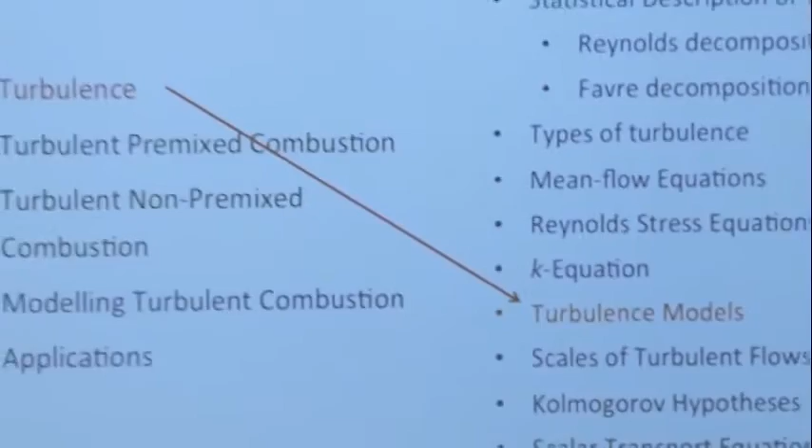Let's try to focus now. So we talked about turbulence yesterday, and we introduced turbulence as a random process that needs a statistical description. You cannot predict each single little eddy, it's impossible. So we said we need a statistical description. We introduced certain ways of defining a mean: time average, ensemble average. We used this Favre average. Doesn't matter - these are just operators that we can apply to a random field, or to the equations describing the random field.

Then we talked of certain simplifications that we make in turbulence, and we derived the mean flow equations - the equations that describe the mean velocities, the mean as defined here in the beginning. When we derived this equation, there was one quantity that was unclosed, a tensor actually, that we don't know, and we need to model somehow. That was the Reynolds stress tensor. We said maybe if we derive an equation for that, maybe that helps us. But we saw that doesn't help, because in that equation you have many other terms that are unclosed. So it just makes the problem worse in a sense.

But then we said, one of the really important quantities to describe turbulence is the turbulent kinetic energy. That's the most important one. If you think of turbulence as eddies, take an eddy - then an eddy can be described by a velocity, let's say in this picture, a rotation velocity or whatever. We call it a velocity fluctuation that's imposed on the mean flow, and a length. If you have these two, everything's defined. Then also you get a rotation time - you can get this from these two quantities and so on.

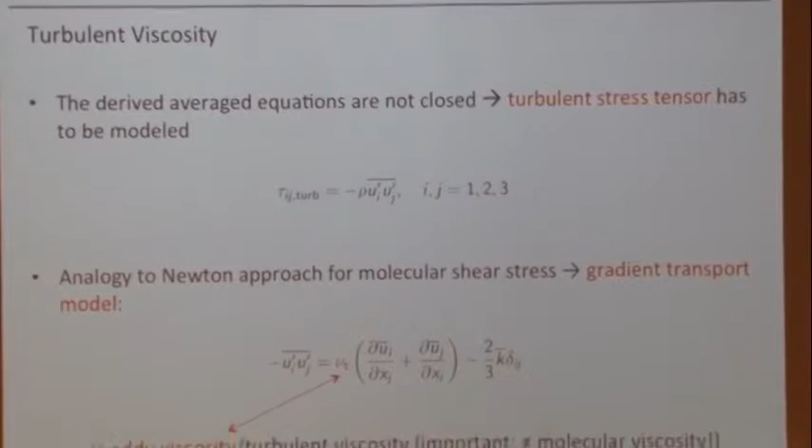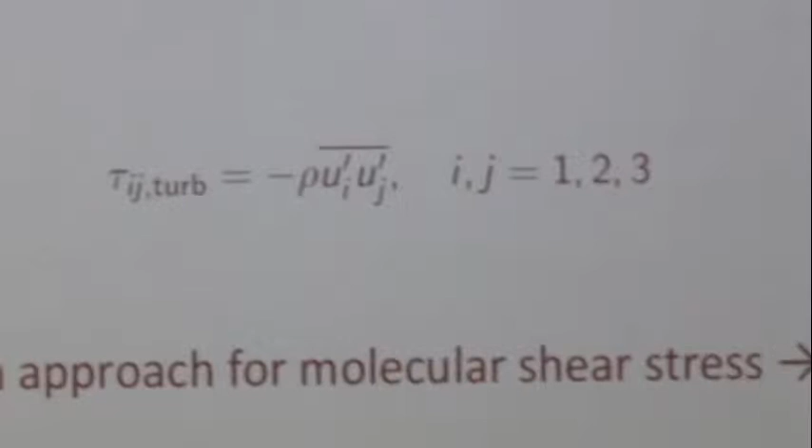We want to talk about turbulence models now. There are different models, but the most used model is the gradient transport model. That's a model that's very intuitive and is often used for terms like this. We know that this is a turbulent transport - it has mathematically, as we said last time, the exact same form as the molecular transport. So think of molecular transport: what's molecular transport? You have a velocity, it goes this way, but each single molecule goes wild in all directions, okay?

And that causes a transport in the mean, a diffusion type process. So turbulence is nothing else: you have the mean flow going one way, but turbulent eddies go in all directions.

Because this has mathematically the same form, we could say for the viscous stress tensor we have a very good model. We know it depends on, is proportional to, a transport coefficient, which is a material property, times the strain rate tensor.

So here we do the exact same thing. We say, okay, let's just say this has the same form, so we use the same model. This now is proportional to a transport coefficient times the strain rate tensor. And this here comes just to make the properties of this thing correct. Let's not worry about this for now.

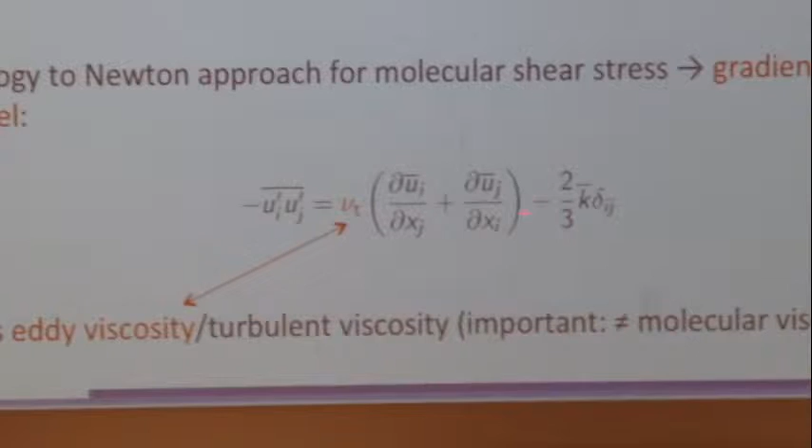Now, because turbulence is not in the material, this new transport coefficient is not the kinematic viscosity for molecular transport, here we have something else. So we call this the turbulent viscosity or the eddy viscosity. And that's not a material property. It depends somehow on the characteristics of the turbulence. So this is how we model this term.

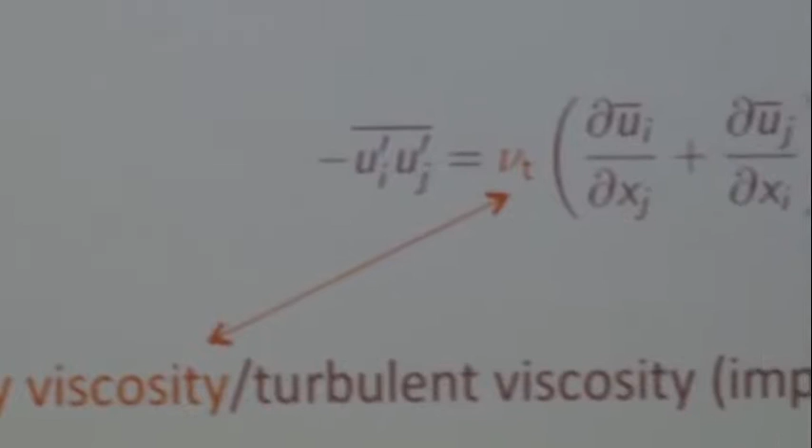And you see, here I had this unknown, and I model it, and now the problem is I have another unknown. So does that help me at all? I have a model to model an unknown, and it gives me another unknown. Does that help me?

Maybe less dependent on your model. Pardon? Maybe the new model is less sensitive. No, that's... it's very obvious if you look at the thing.

Well, this could be highly nonlinear. Whatever happens here, this could be a function of this, and hopefully it could make it very nonlinear.

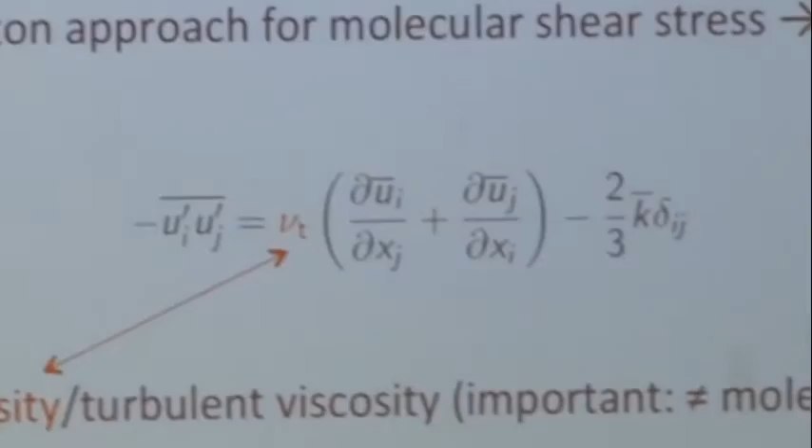This is just a scalar, right? This was a tensor, and so this has 6 unknowns, and now we have only 1 unknown. So in a sense, this helped us already a little bit. And also we put in some functional form here, so maybe that scalar is easier to model also.

Also, this is something that is a viscosity - this thing before involved UI, UJ, whatever that means - and now we have something we call the eddy viscosity. Maybe that's a little more intuitive.

Okay, good. So there are different models for this. Now the challenge is to model this thing. There's the so-called Prandtl's mixing length model, one of the first models. Then there is the TKE, the turbulent kinetic energy based model. And then, what people use today is something like the K epsilon model. The difference between these three really is the level at which these are closed.

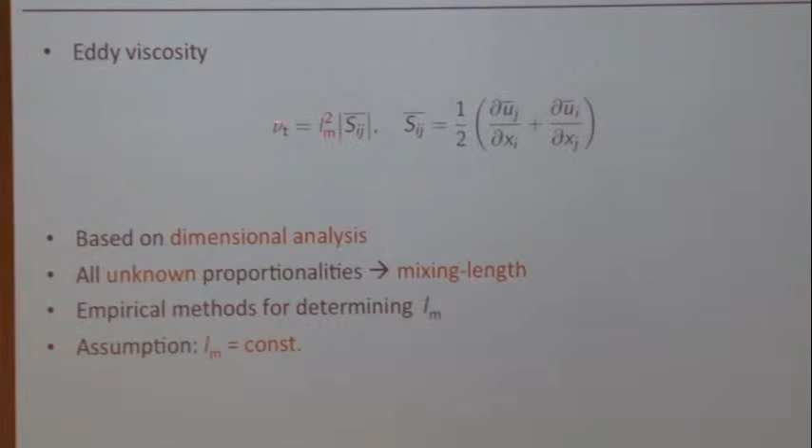So what we'll see, if we look at these in more detail, there is this mixing length model. And what the mixing length model says is - first of all, and this is important, it's not on the slides but it's important - what are the units of kinematic viscosity? This has units of kinematic viscosity.

What are the units? Meters squared per second, okay? So by dimensional arguments, this has to depend on the turbulence. We said the turbulence can be described by a velocity fluctuation and a length scale of the dominant eddies. So if we want to build a viscosity from that, it would be just U prime, the velocity fluctuation, times a turbulent length scale, the length scale of the dynamically important eddies.

So this is how we want to model this. And now the question is just how can we model these individual terms? Why do we do this? We say this depends on turbulence, and these are the quantities that describe turbulence. Dimensional analysis gives us this.

Now we had one unknown, now we have two unknowns. It seems we're going the wrong way, but this is not a very intuitive quantity. If I would ask you, in a turbulent flow, how large is the turbulent viscosity? Can you estimate this? You would have to say maybe 1,000 meters squared per second. We have no feel for this.

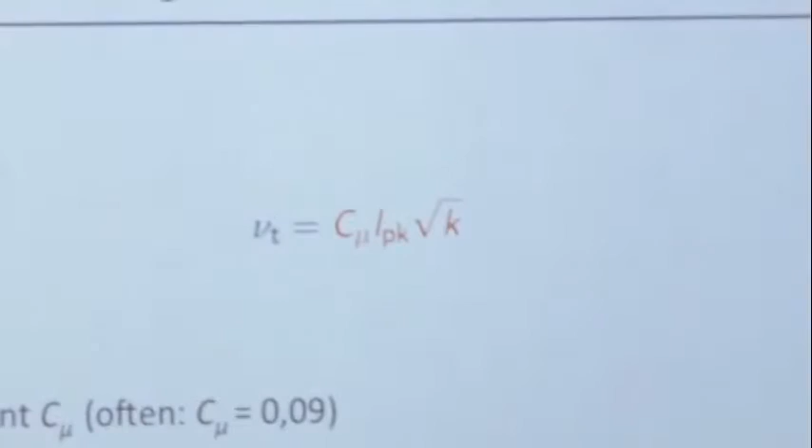And so the next model here is the turbulent kinetic energy model. That's already going quite close to modern models, where we say, okay, same thing again. L is still here, this is L. And then for the velocity scale, we say the velocity is just the square root of the kinetic energy. That's the velocity, the turbulent velocity fluctuation. And now where do we get K? K comes from this transport equation I showed you earlier.

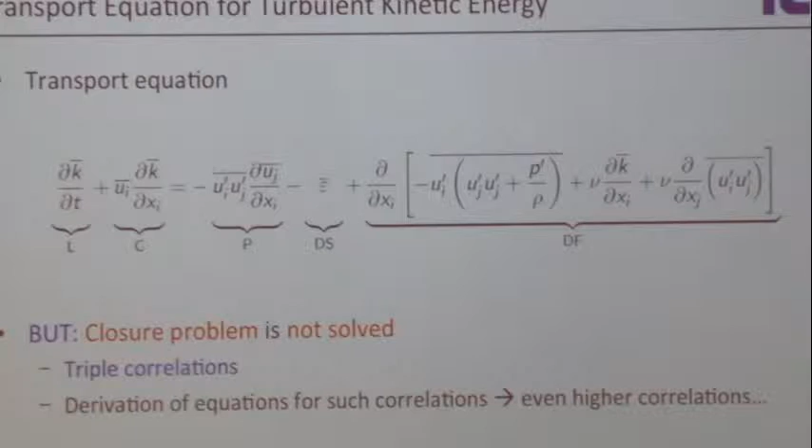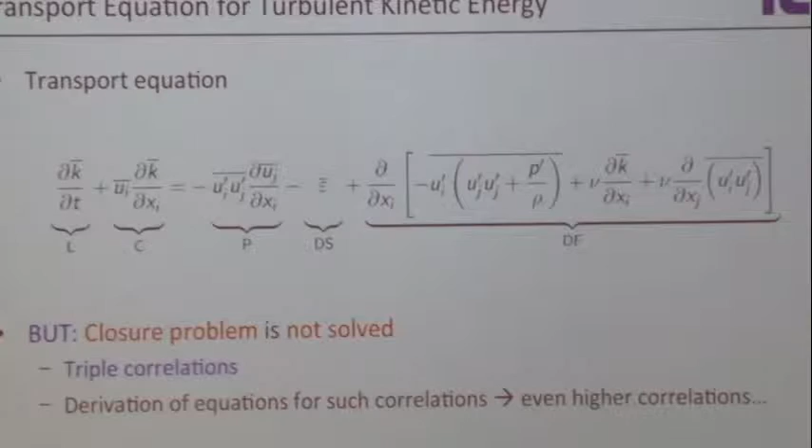So let's see if we say anything about this. This is the K equation. And so here all we need to do now is we need to say, this we don't need to model anymore, right? Because this is closed. If I have a model for nu t, that gives you a model for ui, uj. So this is within this model, this is closed already. This here, we use a gradient transport assumption, and this here, there's a model for this also. So this needs to be closed, but that's how this model works. So here you solve an equation for kinetic energy, and you still have to guess this thing. So it's still a model. It's not complete in the sense that as a user, you don't need to have real good physical insight.

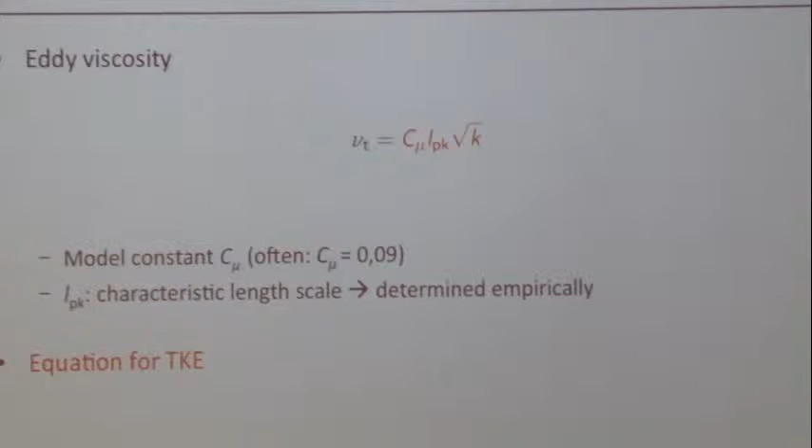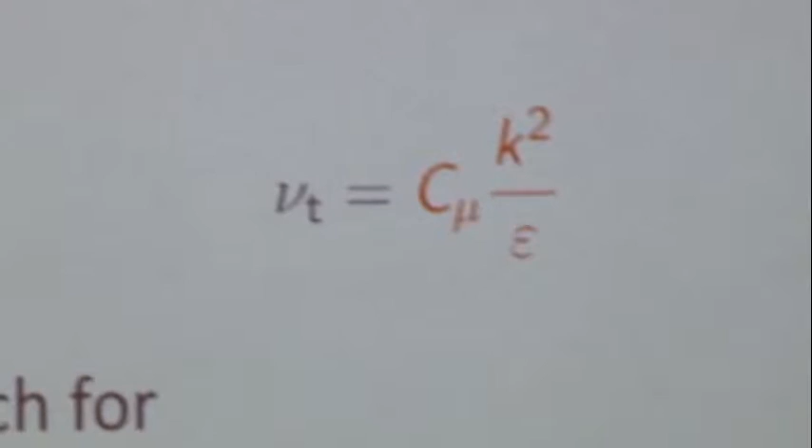So now the models they use today are, let's say, K omega model or K epsilon model or things like that. And the K epsilon model, that's one of the most well-known, is the same thing. Here you say U prime times LT. U prime, that's again from the kinetic energy, is K to the 1/2. And then you say, now I need a second quantity. I want a second transport equation for a length scale. So you could solve an equation for a length scale, for example, but here, because epsilon is an important quantity, here people suggested to solve an equation for epsilon, okay?

And then just by dimensional arguments, you have k, you have epsilon. Epsilon is the turbulent kinetic energy dissipation rate. You can find a form for this L. And it turns out, K has units meters squared per second squared. Epsilon is a kinetic energy dissipation rate, so that has units kinetic energy per unit time. So it is meters squared per second cubed. That's what it is. And so if you put these two together, LT, a length scale, is k to the 3/2 divided by epsilon. So I put these two together, this is what I have.

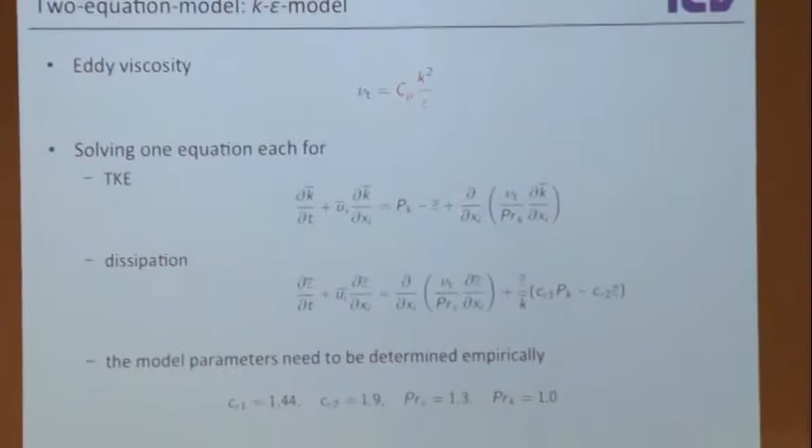And now I have two equations here. One is the k equation, one is the epsilon equation. And so you see, for this transport term, we just use a gradient transport assumption. There's the nu t here again. And then basically the way you do the epsilon equation is you just write the same equation.

Transport, in a sense, is an empirical equation. These are the same terms here: advection, turbulent transport, and then production and dissipation, also using the same terms. You just make them dimensionally correct so they fit this equation. That's what it is.

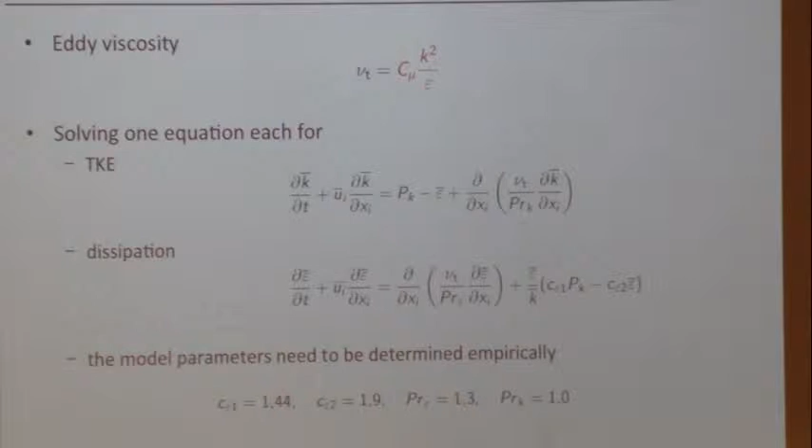And then there are a lot of constants here. These constants are given like this for certain cases, and for other cases they're different. For certain cases, these constants work well, and for other cases they don't, and you have to use a fit constant. So there's a lot of fitting with this K-epsilon model, with this C epsilon 1 and C epsilon 2 constant. But that's a model one can use.

This shows once more how these terms are modeled. This is the turbulent transport term here. Essentially, you just take this whole thing and use a gradient transport assumption. The production term doesn't need to be modeled, as I said, because I can just plug in the model here for u i u j, and it is closed. And this is all that was to be done.

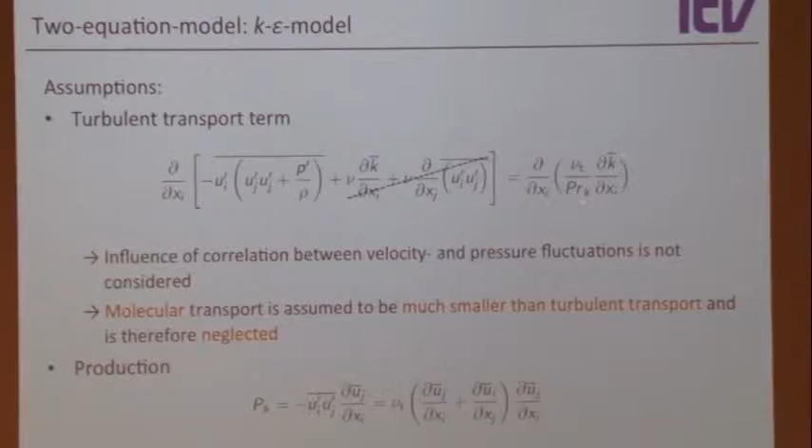Because these are not actual Prandtl numbers. This is not the Prandtl number. You could say this is a Prandtl number for k. The Prandtl number refers to a scalar, and k is a scalar, so this is just a Prandtl number that refers to k. And this here is a Prandtl number that refers to epsilon. But again, these are basically fitting constants.

Because really, you could say this is a scalar equation, so you would have to have a diffusivity here, but we use the exact same transport coefficient as for the momentum equation. And if you would do the same thing for the viscous term, then you would put a Prandtl number there. So here also we call this a Prandtl number or a Schmidt number, whatever you want to call it. These are just fit constants. They don't refer to molecular properties like an actual Prandtl number.

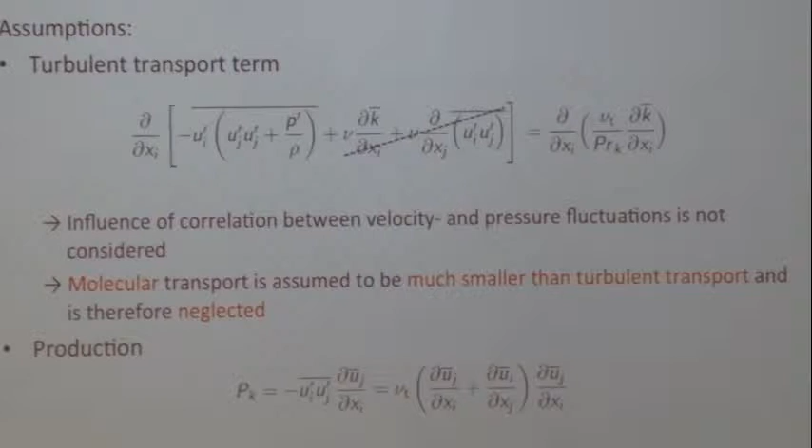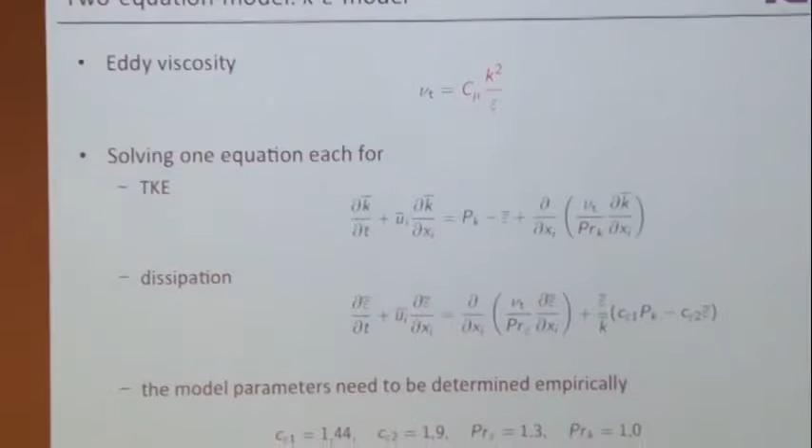That's the point - these are, in a sense, fit constants. These values here you can actually determine by writing these equations. If you write this model for isotropic turbulence, you can get the decay rate of isotropic turbulence as a function of this C epsilon 2 parameter. So if you know the decay rate from the experiment, you can get C epsilon 2. And then C epsilon 1, in a similar way, you can get for homogeneous turbulence.

But these values that you get for these ideal cases don't work in real life. So the thing about the K-epsilon model is, in a sense, it's an empirical model, and for each different case you basically have to refit these values. But it's not as bad as it sounds, because if you compute a turbulent planar jet, we know these work. If you compute a round jet, we know they don't work - you get the wrong spreading rate. But people know values for this that also work for a round jet, and so on. So it's an empirical model, and one has to adapt it.

So if you have a better set of coefficients, use your better set of coefficients for your case. So if you say it's too high or too low, that refers to your specific case, not to the general world.

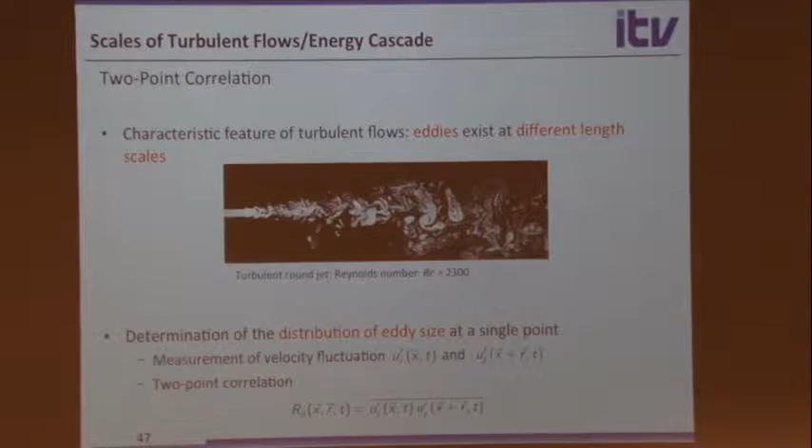So we have models now, but we want to look a little more into turbulence physics, because that becomes important later on. I want to show you how analysis is done in turbulence. In turbulence, we talk about these eddies and so on, and the question is how do you... So we said an eddy has a velocity fluctuation - that's the turbulent kinetic energy, and we have an equation for that. But the length scale, we don't have a real way of defining this for now.

What people do in turbulence theory is they very often look at these 2-point correlations. The idea is that you take the velocity at this point and the velocity at a different point, and you do this many, many times, and you look if they correlate. If they correlate, that would mean they are part of the same eddy. If I measure velocity here and way over here, and my turbulent eddies are much smaller than this distance, then most likely these are totally uncorrelated. So when these points are very close together, they must be perfectly correlated, and when they're far apart, they're not correlated. How fast this correlation drops tells me something about the size of the eddies.

So this is the 2-point correlation. It's a very complex function, because I can correlate the u velocities, but I can also correlate the u and the v velocity, or the v velocity here with the u velocity over there. So it's a tensor.

This correlation function is a function of space. I can evaluate this everywhere - my first point can be anywhere in space, and my second point can also be anywhere in space. So it's a function in 6 dimensions. It's a function of time, and it's a 3x3 tensor. So it's relatively complicated - you can't measure this thing, it's impossible. But for theory, you can use it.

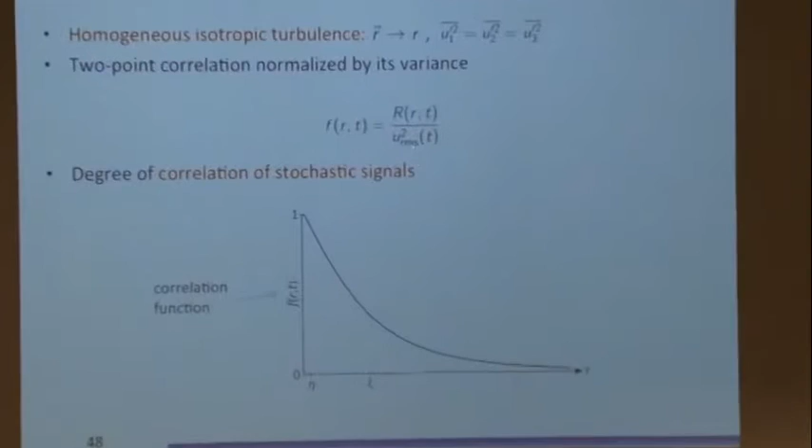You can normalize this. If you normalize this with u squared, that is just the correlation function for r goes to 0 - then it's just u squared at this point. So this means at r equal to 0, this function, the correlation function, has to be 1. And as I said, for r goes to infinity, the correlation should go to 0. How fast it goes to 0 tells me something about the correlation.

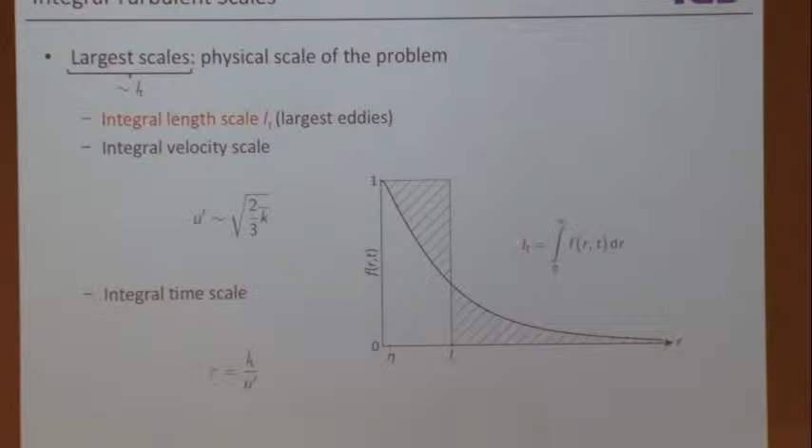So we define our length scale with this. We say the integral of this correlation function gives me the length scale of the large turbulent eddies. We call this length scale typically the integral length scale, because it comes from this integral. So integral length scale just means that's the length scale of the large motions of the turbulence.

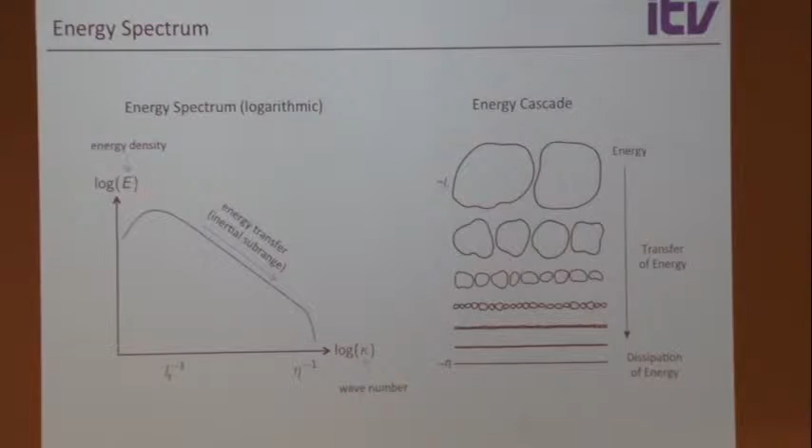So interesting is that this is a function of r, the distance of these 2 points. And if you do a Fourier transform of this, then you get the energy function, which is now a function of the wave number. That's because this basically has units of u squared, the units of energy. This energy function, if you take the Fourier transform, is basically energy as a function of the wave number, and the wave number is just the inverse of the length scale. So this energy spectrum function shows you the energy you have at a given eddy size.

So this is how it typically looks like on a logarithmic, or double logarithmic scale, and what you see is you have a lot of energy on the large scales - small wave number means large eddies. So this is small wave number, this is very high wave number. At small wave number you have a lot of energy; at high wave number you have almost no energy.

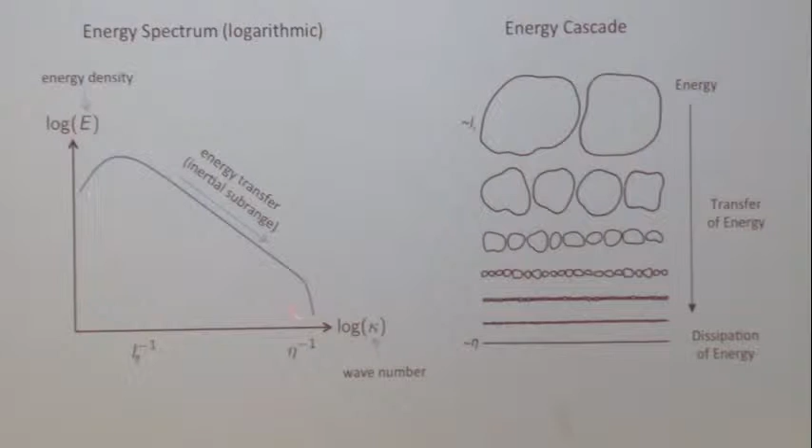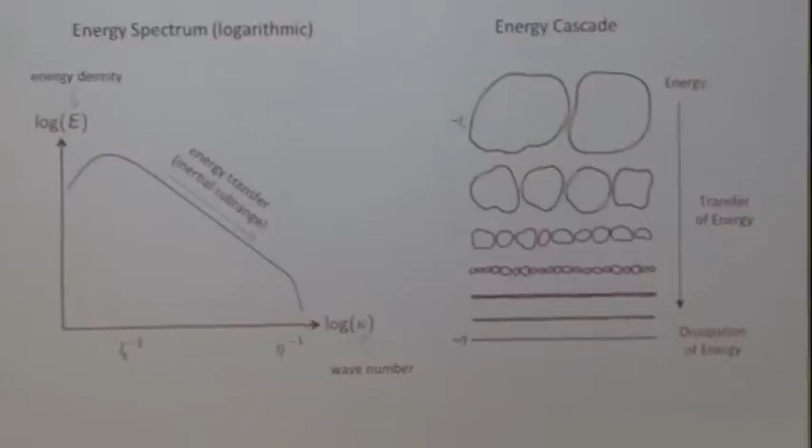But we said all the dissipation of the energy happens at these small scales, and the production happens at these large scales. So this is how turbulence works - it's produced at the large scales and dissipated at the small scales. This means there must be some mechanism that converts large eddies into many smaller ones, these smaller ones into even smaller ones, and so on. That's what we call the energy transfer in this wave number space. This is the vortex stretching mechanism I mentioned last time - it takes the energy of these large eddies and makes them smaller and smaller.

So in turbulence theory there are these Kolmogorov hypotheses, and that's something that really helps us understand turbulence.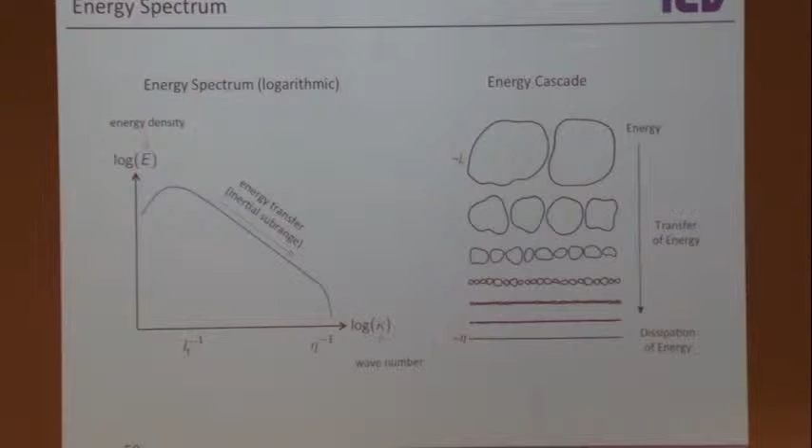The first thing Kolmogorov said is when we look at these small eddies, if I look at the spectral content, at all the eddies with very high wave number, then he said they must be isotropic. They don't know the direction anymore, and there are reasons for that.

Then he said the statistics of these eddies depend on only two parameters: the dissipation, the turbulent kinetic energy dissipation rate, and the kinematic viscosity. This comes from dimensional analysis, but really the way he did it is he took the equations, derived and simplified them, writes them for this, and sees it has these two parameters and nothing else.

If it depends only on these two parameters, you can form a length scale from them, and this length scale is the so-called Kolmogorov length scale. That is the length scale where the advection process that makes the eddy smaller and smaller, and the viscous process that tries to damp out the turbulent fluctuations, are equal. So this is the smallest length scale in turbulence.

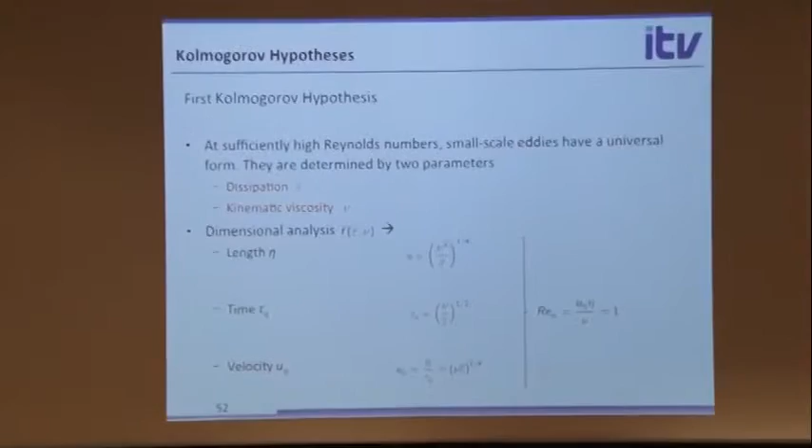You can also build a Kolmogorov time and a Kolmogorov velocity. So this describes these very smallest eddies. And if you build a Reynolds number with these three, it's equal to 1, which basically means that here the inertial and the viscous forces balance each other. So that's the first hypothesis.

That's already very exciting. But then he came up with a second hypothesis, which says: if I look at scales much smaller than the large scales, things don't depend on the large scales anymore—that was the first hypothesis. But what if I look at length scales much smaller than the large scales, but at the same time much larger than the small scales—somewhere in between?

If I'm much larger than the small scales, then it shouldn't depend on viscosity anymore, because viscosity only becomes important at small scales. So there must be a range, the inertial subrange, that doesn't depend on the geometry of the flow, the nozzle geometry or whatever, because it's so much smaller than that, it doesn't know anything about it. And also it doesn't know anything about viscosity, so it must be independent of viscosity as well.

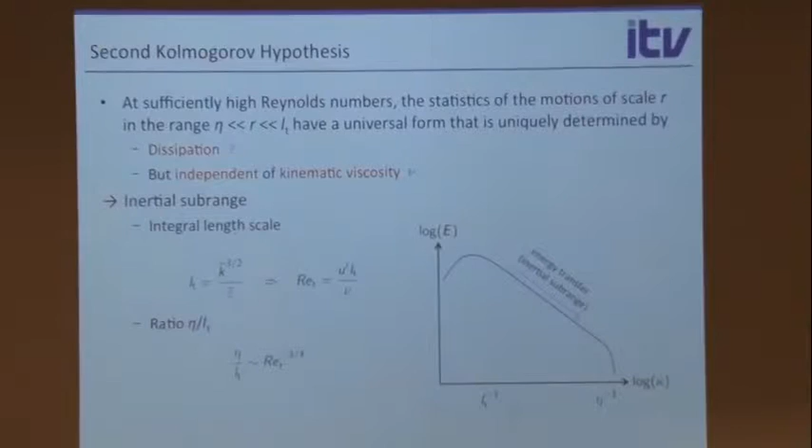So this only depends on epsilon, and epsilon is the energy transfer rate—the rate of energy transferred from the large to the small scales. And from this you find the so-called Kolmogorov scaling.

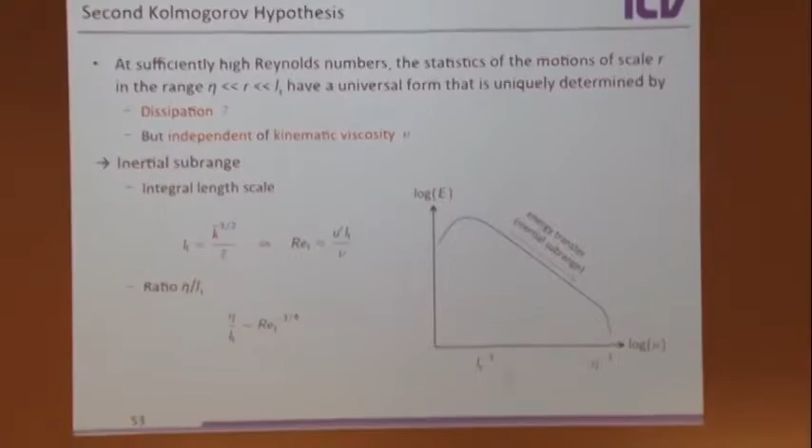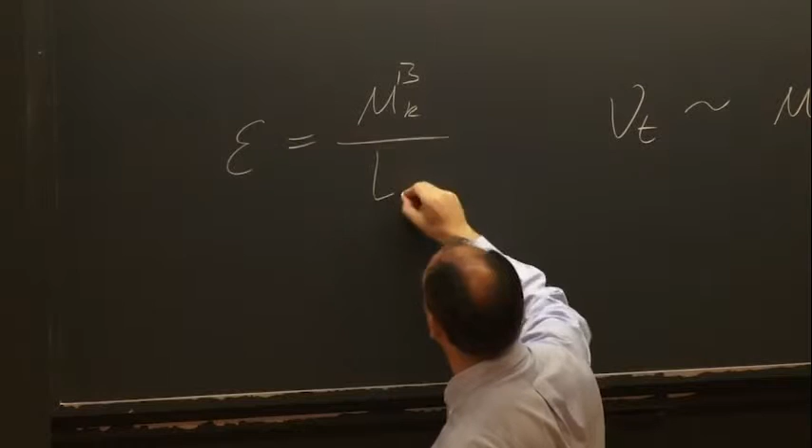It turns out that at any length scale—this is written here for the integral scale, but at any length scale, any wave number k—you can say the velocity fluctuation at that scale, cubed, divided by this length scale, is equal to epsilon. This is true for all scales. That's the so-called Kolmogorov scaling, very important for turbulence.

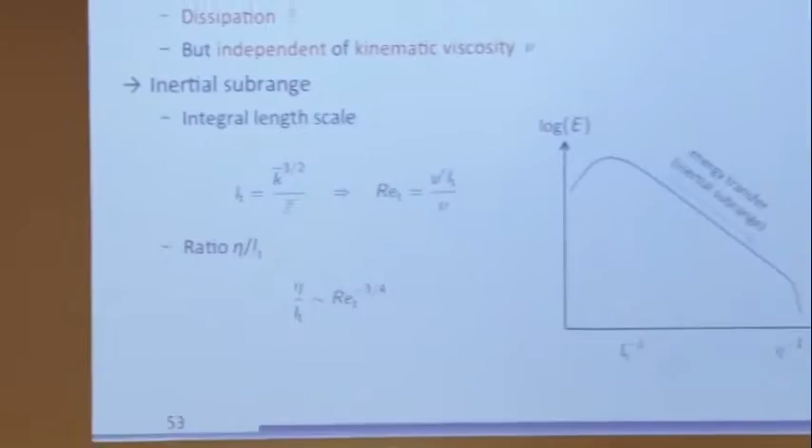This is written here for the large scales. If you use this scaling, you can find that the ratio of the Kolmogorov scale—the smallest scale in turbulence—to the largest scale in turbulence is proportional to Reynolds number to the minus three-quarters. That's important sometimes when we do simulation. So that's just a little bit about turbulence theory.

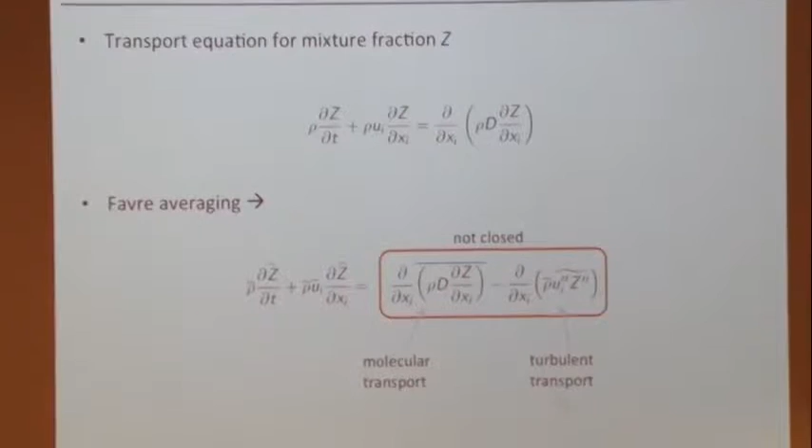Then we talked about the Reynolds equation for the velocity. Here in combustion, we're often interested in scalars, so this would be the equation for mixture fraction. We can do Favre averaging here too, and then we get these terms: a molecular transport term and a turbulent transport term. The molecular transport term is usually neglected in the Reynolds averaged context.

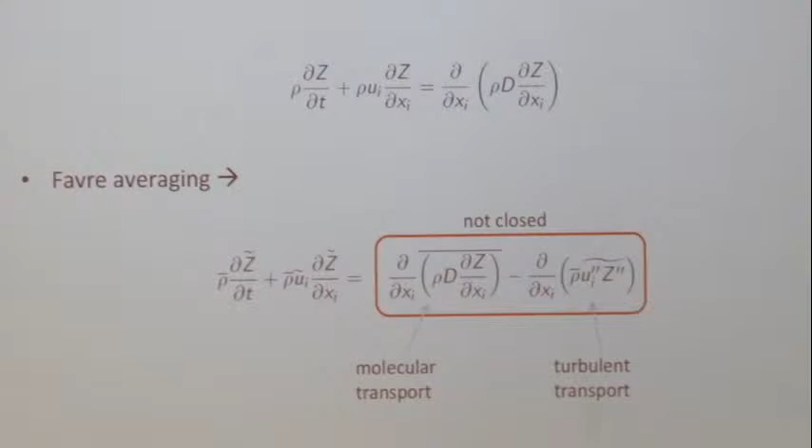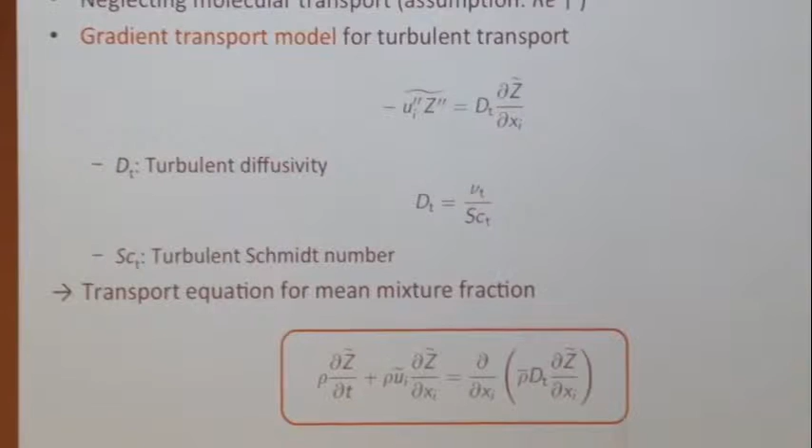This term is modeled again with a gradient transport assumption—same thing as before. So here, gradient transport assumption gives us a turbulent diffusivity, D_t, and if you assume a constant turbulent Schmidt number, whatever value is good for you—people sometimes use 0.7—we relate it back to the eddy viscosity. We already have a model for that. So this is the equation here.

Then the other thing that's important: for the velocity field, we had an equation for the mean, and then an equation for the kinetic energy.

We want to have an equation for the mean, and then one for the scalar fluctuation, some equation that tells us something about the scalar fluctuation—the so-called scalar variance. The variance, the fluctuation, is just the instantaneous minus the mean. So I can take the equation for the instantaneous minus the equation for the mean, and that gives me an equation for the scalar fluctuation.

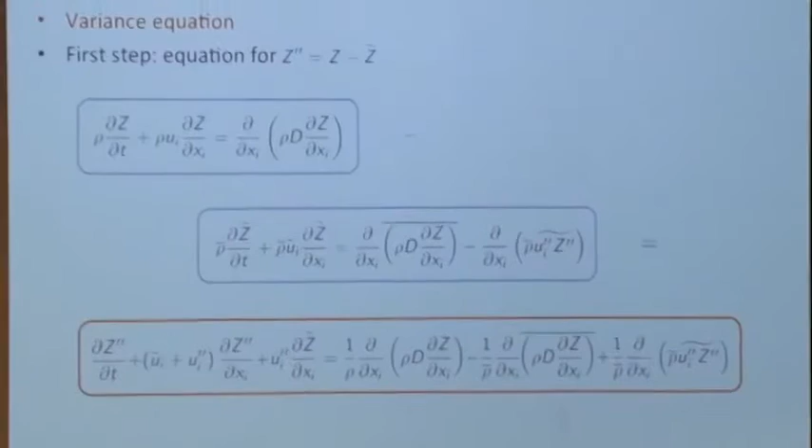Now I multiply that by z prime prime and average, and I get an equation for 1/2 z prime prime squared average. That's the scalar variance. If you do that, this is what you get—since it's 1/2 multiplied by 2, the 2 ends up here somewhere.

This equation is again very similar to the kinetic energy equation, in the sense that you have the unsteady term and the advection term, and then a turbulent transport term, which we model again with a gradient transport assumption. Then we have a production term, which depends on the equivalent to the Reynolds stress tensor, but now for the scalar—we call it the turbulent scalar flux.

This term is modeled with an eddy viscosity type model, or eddy diffusivity type model—a gradient transport model. Then we have the dissipation rate term, defined as the gradient of the fluctuations squared mean.

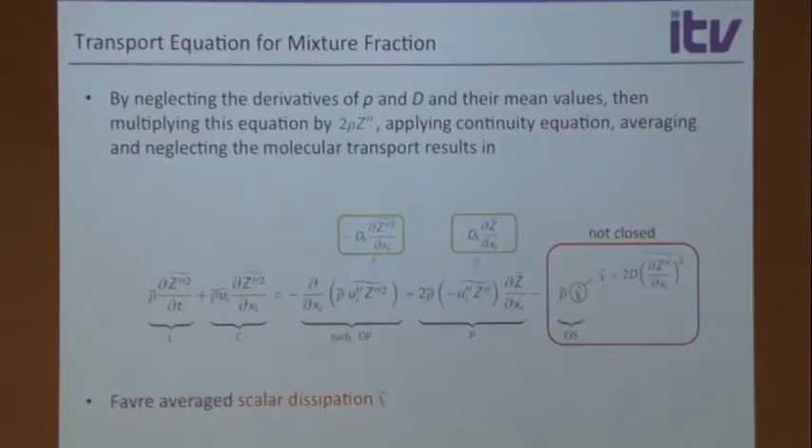That's something that's important only at the very smallest scales, and what it does is dissipate the variance. For combustion, this is very, very important—think about it: let's say you have...

A fuel stream and an air stream, initially unmixed. Here's some spatial coordinate, and here's mixture fraction, going up to 1. In this part you have only fuel, and in this part only air. What does the turbulence do? The eddies just take some part of this and put it over here, and take some of that and put it over there, but they don't really mix.

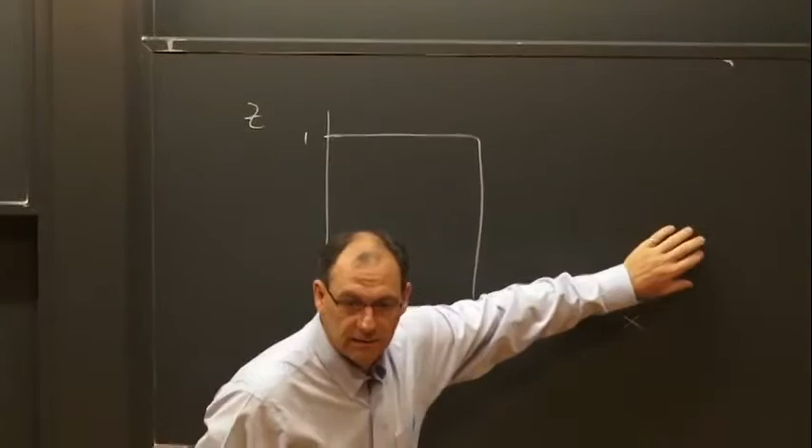So the turbulence first gives you something that looks like this, then smaller eddies break this up again, and you get things that look like this but on all scales—still all 0 and 1, nothing in between. The turbulence just moves stuff around, makes the scale smaller, the gradients larger, and so on. But the original profile has no variance in these parts.

But once the turbulence starts mixing this, you create a lot of variance—a lot of fluctuation. The mean looks something like this, but at each point I have the maximum possible fluctuation. So this gives you a large variance, and then dissipation here is what...

...the viscosity, or the diffusivity, now does. It will mix these on a molecular level, so that ultimately everything is mixed on a molecular level, which means it takes out the variance. Taking out the variance means mixing fuel and oxygen on a molecular scale.

Remember we said earlier, if you assume infinitely fast chemistry, then in non-premixed combustion—which is what this is supposed to represent—things mix and burn. For infinitely fast chemistry, the burning rate depends only on molecular mixing, and this term is responsible for the rate of molecular mixing. So for infinitely fast chemistry, this would be something like your reaction rate.

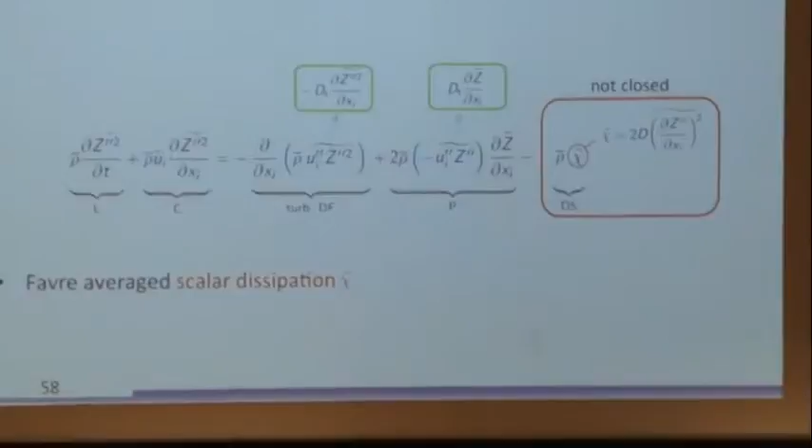But for finite rate chemistry, this is still very important, though the chemistry also matters. This term for combustion is very, very important to get right, because it gives you an estimate already, or an upper bound, for the reaction rate.

Okay, so this is how we model this.

For the K epsilon, for the momentum field, we said we solve an equation for this. You could do this also here, but what's done very often is you say, I can define a time scale from this. This has units 1 over a second. Let's start here: this has units kinetic energy, and this has units kinetic energy per second. So this ratio is seconds.

So now if I do the same thing, if I define a scalar timescale here in exactly the same way, the dissipation rate in the denominator and the variance in the numerator, I also get a second here. And so we say the assumption here is that the timescales are equal, or they're proportional to each other, like here.

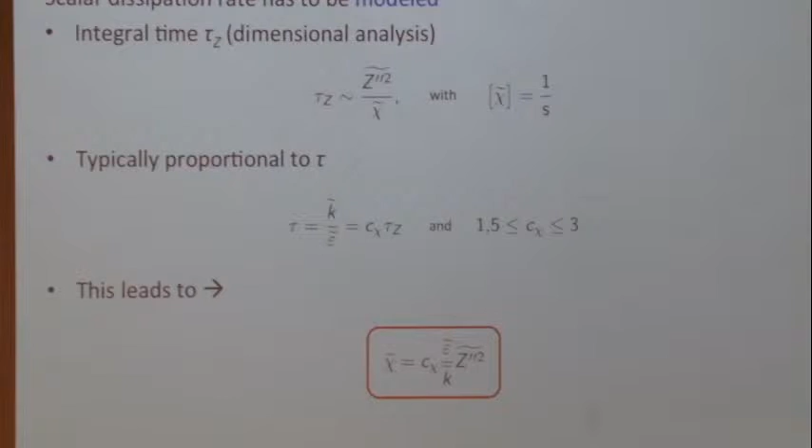So if we do that, then the dissipation rate is epsilon over k times the variance. So then this equation, if I use this, is closed, because we assume the timescales are equal.

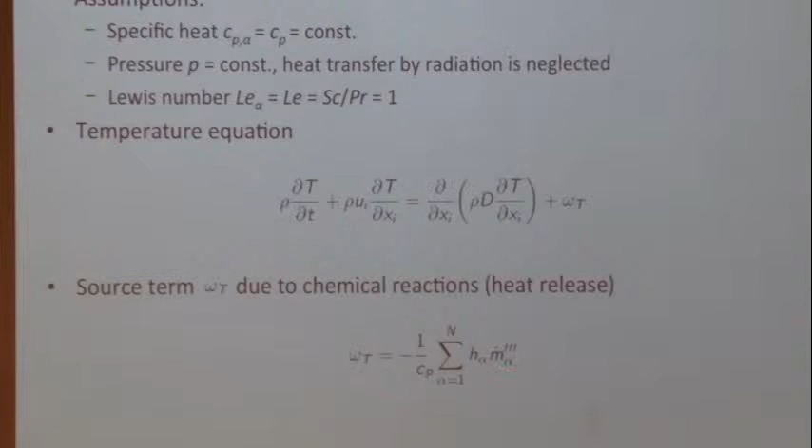Now we can do the same thing for the reactive scalars. Let's take the temperature here, with a chemical source term. This is the species equation, also with a chemical source term. You see the form of these is roughly the same if I neglect a few terms here for the temperature, which we do just for illustration purposes.

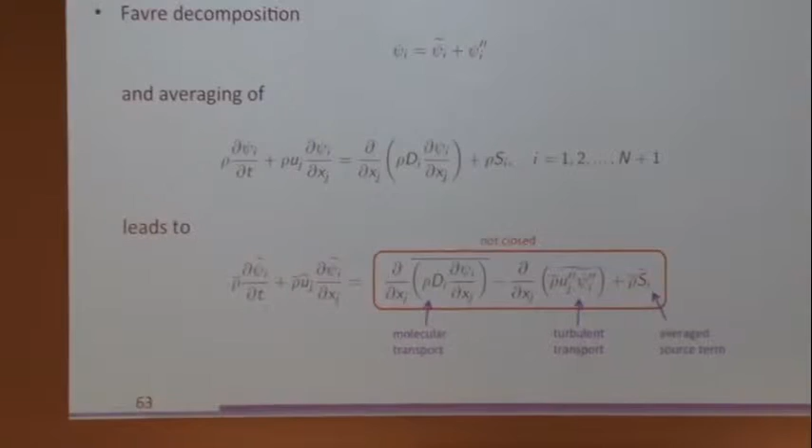But then I can define a scalar here, a reactive scalar, which could be either the species or the temperature. And I have this equation with a source term, and I take the average, introduce the Favre decomposition, take the average, and I get the same equation as before, just with the extra chemical source term. I can make the same modeling assumptions, and the only thing that's different here is really this chemical source term.

Now, the chemical source term is not so simple. It's very nonlinear, and we said if it's nonlinear, you get these correlations, like the Reynolds stress. We got that only because the advection term is nonlinear, and this is not like that—the Reynolds stress is like Mickey Mouse, the advection term is like Mickey Mouse compared to the chemical source term. The chemical source term is so nonlinear that you'd expect something big to happen in this correlation term.

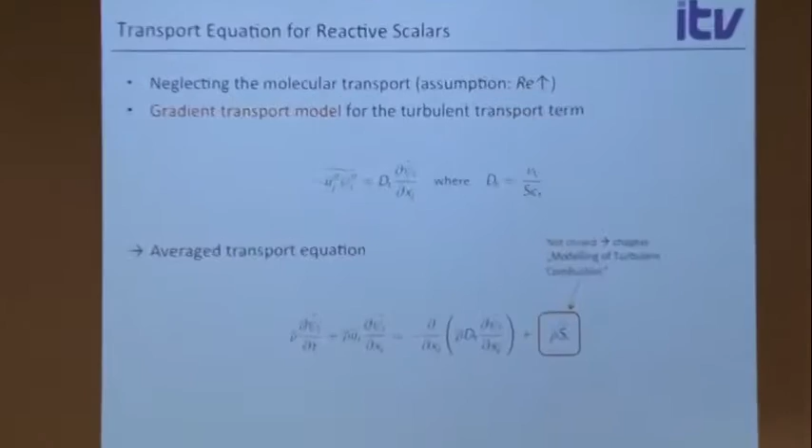Given the fact that the Reynolds stress term already made a huge difference, that's something to keep in mind, and we'll talk about this in one of the next lectures—what error we make when we model this in a naive way, and also how we can model this in a better way, maybe.

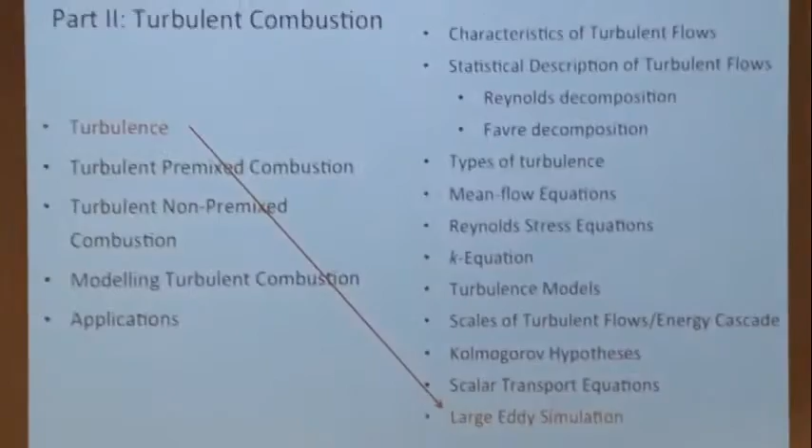Okay, at the end, I just want to say a few words about large eddy simulation. Large eddy simulation—so maybe first about direct numerical simulation, a term I've used already. Direct numerical simulation means nothing else than taking the governing equations, maybe the Navier-Stokes equations plus the scalar equations, energy equation, and everything, without any modeling assumption, and just solving these equations.

Now, without any modeling assumption is not actually true. If you just solve the momentum equation, it has the viscous stress term—that is a model already, but we know this model is just perfect, the model we use for the viscous stress with kinematic or dynamic viscosity. So we say these are the true equations that describe the true flow physics, and it turns out they do. This is really, really good.

So when you add the scalar equations, then you have a chemical source term. You have to have a chemical mechanism, a reaction mechanism—these are models. So in a sense, you make some assumptions, but this is what we call the true world. Given a chemical mechanism, this would be the truth.

So why do we talk about modeling at all if we could just solve these equations? The fact is that you can solve these equations for true turbulent flow, everything, but only for a very, very small volume, because it's so expensive to solve, since in turbulence you have such a big range of different length scales. That's the real problem. So if we want to estimate what it takes to do this...

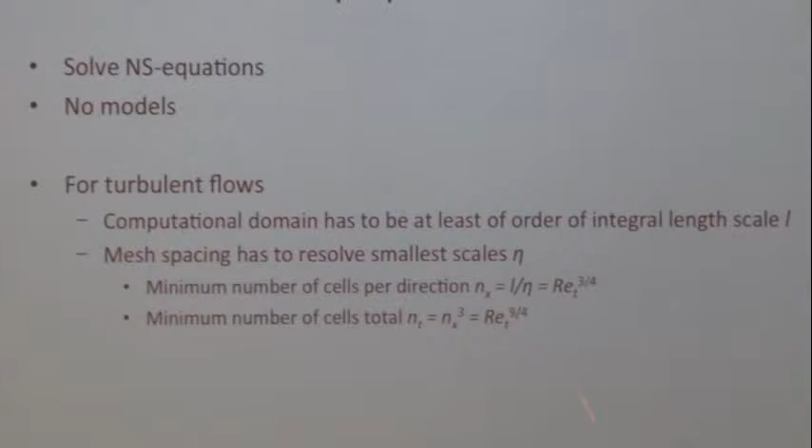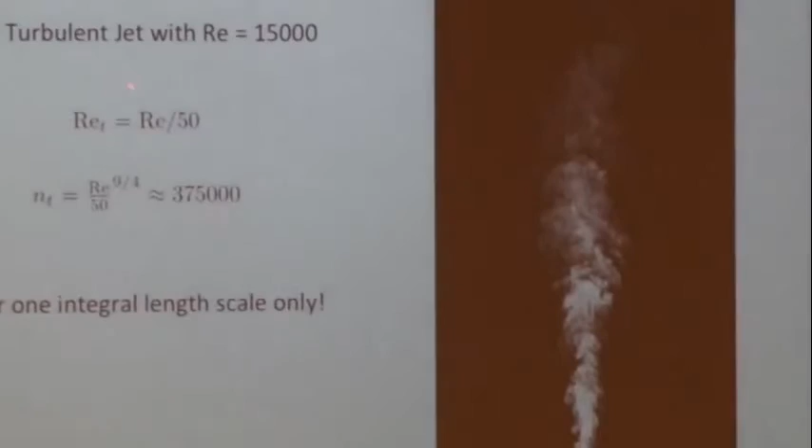Okay, so now you can estimate the jet Reynolds number. This is the turbulence Reynolds number. Jet Reynolds number is typically 50 times the turbulence Reynolds number. If you have a jet with a jet Reynolds number of 15,000, the number of points you need is like 375,000.

That doesn't seem so much, but the point is that would be just for one integral scale. See, this is one little area here. If I want to compute this whole thing, you can imagine how huge what I need would be.

By the way, this picture is taken from the book of Steve Pope, called Turbulent Flows. Nice book on turbulence. I teach my turbulence course at home according to this book, and you see some of the material in this lecture is also from this book. I just want to acknowledge this.

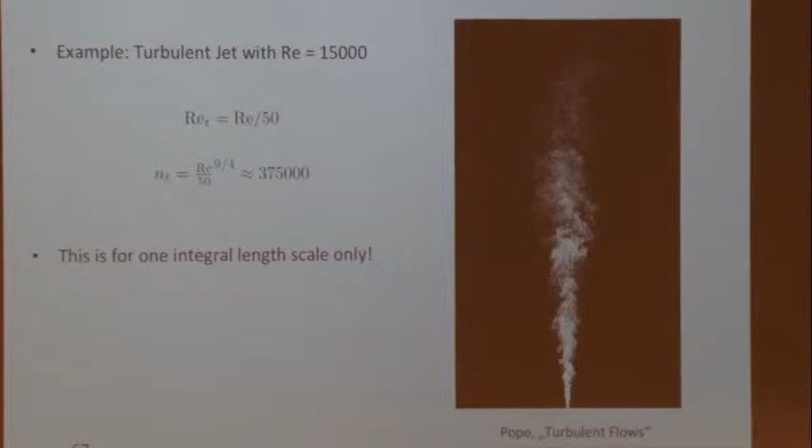So that's DNS. DNS is very, very expensive, and it can only be done for certain cases. We do DNS usually just for certain, a little bit idealized cases, to see then if the models work for these cases, okay?

So in large eddy simulation, for Reynolds averaging we said, okay, this is one realization of the flow, and why don't we take 1,000 or 10,000 realizations of the flow, and we average these all together. That's one way to do it. And then there's no turbulence dynamics left in this. You might still have unsteadiness, but that's not turbulence, because I just averaged out all the turbulence.

Now, in large eddy simulation, what we do is, since we can't resolve all the scales, we say let's apply a spatial filter. It's like a low-pass filter where we filter out all the small-scale fluctuations, and we filter out so much that what's left over can be resolved on a mesh that we can afford.

So if you do that spatial filtering, this is a video here. I'm not sure if this is running now. Yes. So this here is a time average of this. And you see now the averaging time window gets shorter and shorter, and you see how this ultimately becomes the instantaneous flow.

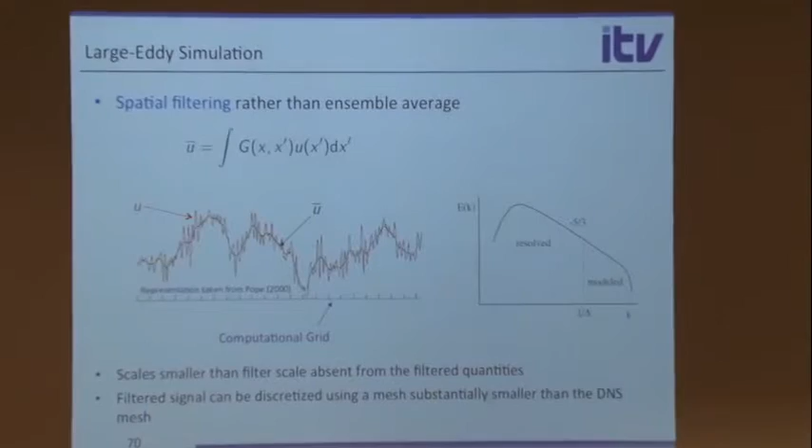So this is kind of the idea, this is what we do. Take an instantaneous velocity signal—let's say the red line here, take a jet, and then we take a measurement along a line of velocity, and this would be the velocity here, this red line. And you see that for the very small scales, I would need many, many grid points to resolve the red line. But in LES, we say we apply a filter.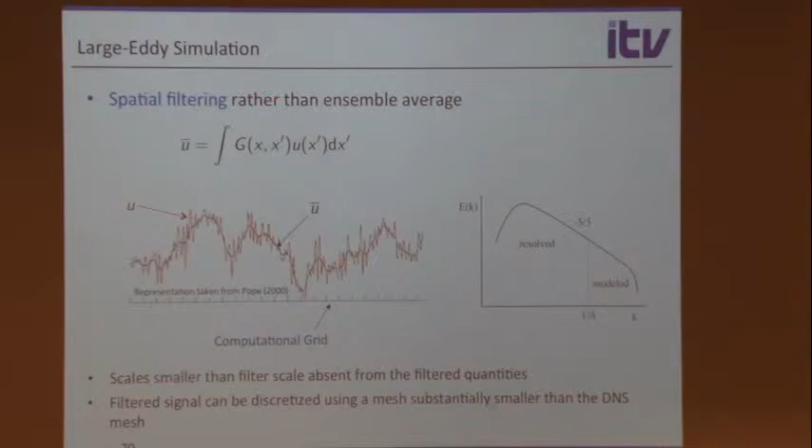So typically you have a filter kernel, and you convolute the velocity field with this filter kernel to get a filtered velocity. And now we have to be careful: I use the overbar to denote a Reynolds average so far.

Okay, here I use the overbar to denote the filtering. Just keep that in mind. So this would be the black, then would be the filtered field.

So if you look at this energy spectrum function, we said we have the energy of the different scales. These are the very small scales. So here, this is all just filtered out, and what's left over is just this part. And this has a good advantage, actually three advantages.

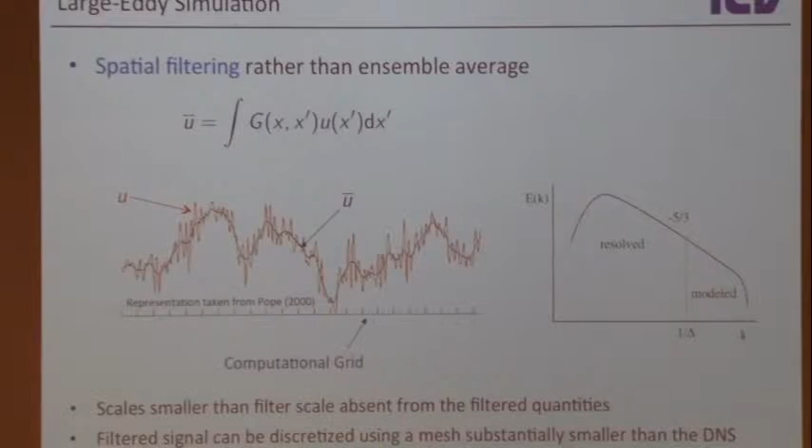Number one, first advantage: all the energy, this is a log scale. So this compared to this is huge, okay? And this here, as you see, all the energy basically is resolved. Only a very, very small part of the energy is filtered out. So the whole dynamics of the flow, maybe it's not so bad.

Second advantage, this now needs to be modeled. You can't just take it out and not correct for it. So we need to introduce a correction for this. But the modeling of this term is a lot simpler than modeling the entire turbulence, because we said earlier the small scale turbulence is isotropic. It has the same statistics in all directions and so on. So isotropic turbulence is much easier to model than the full turbulence.

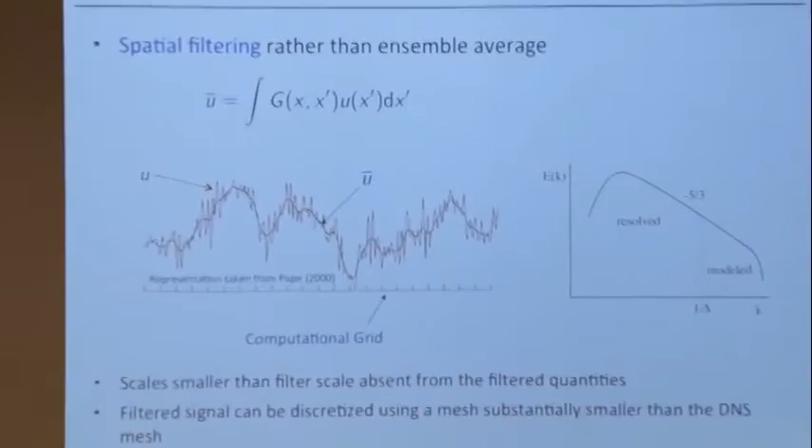That's the second. And then the third, and many of you might have heard about this, is that in this modeling you can also use so-called dynamic models. We said earlier you have these models and you always have these constants, and you need to fit these constants somehow. In dynamic models, what you do is you also have constants, coefficients now.

And if you look at this, let's say you don't know what this is. Let's say you don't know this, because you need to model it, you don't solve it. But you solved all this. Now, you see, I get a lot of information about the spectral content of this.

And you could now estimate, if I would ask you, how does this look like? You would say it probably just looks like this. I mean, you don't know where it goes down here, but you kind of know it goes like this. So you can use the spectral content that you compute on the large scales to estimate the constants that you use to model the small scales.

Yes? For the filtered velocity, I see that you need the velocity field, but you don't have it. The instantaneous velocity field, is that what you mean? Yes. So if you had an experiment, then this is how you would evaluate it. But just like when we defined the average, the Reynolds average, we defined the Reynolds average with an instantaneous velocity.

It was the average of the instantaneous field. And then we said we have the equation for the instantaneous field, and then we apply this operator to that equation. Here's the same thing. We don't have this, but we have an equation that describes this. The instantaneous momentum equation describes the dynamics of this. And we take the equation and apply this filtering operator to it, and that gives us an equation for this filtered field. This is very similar to what we did before.

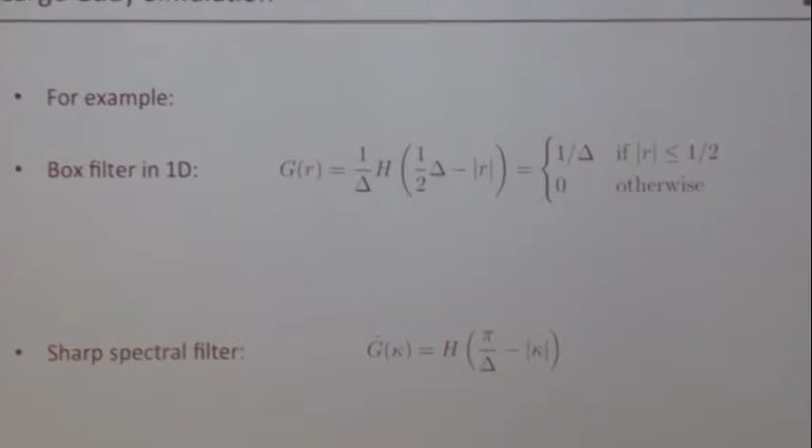So these filters, there are different filters you can use: the box filter, the spectral filter. So this would be basically a box filter, you average over a box. And then the spectral filter, you also average over a box, but in spectral space.

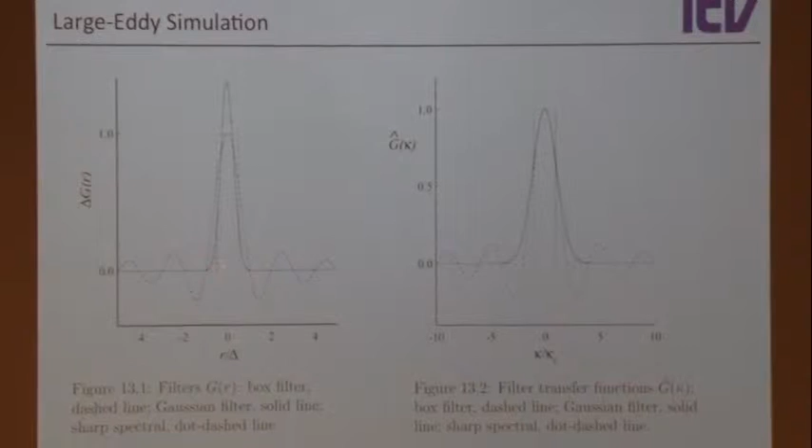It's interesting that if you take the box filter, so this is space, and this is how this filter looks like. It's just a box, right? It's 0 everywhere, and it's 1 within the box. And if I now take an average over the entire field, it will just give me the average within this box. So if I take the Fourier transform of this, you see in wave number space now it's not local. This averages over all wave numbers. And vice versa, if I take a box filter in wave number space, it will be non-local in physical space.

That's just an interesting fact. If you take a Gaussian, you can also use a Gaussian function as a filter. Turns out that's compact in both physical and wave number space, so that might be a good choice.

Okay, so as I said, we can take the instantaneous equation and apply the filtering operator. This is what I get. Again, I get something interesting here from the advection term. I'll write it.

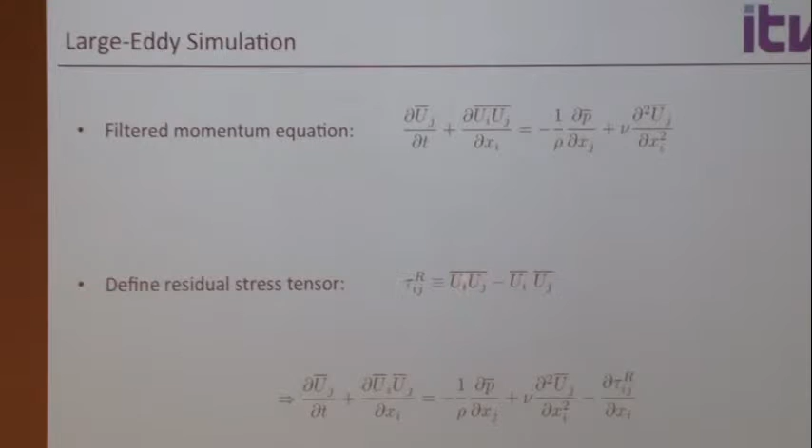I write it like this term. This is what we call the subfilter Reynolds stress, and this is how I can write the equation. You see, this is now very similar in form to the Reynolds equation. It just has a different meaning. This here is a Reynolds stress, but it's a subfilter Reynolds stress—the Reynolds stress that results just from the scales that are filtered out, not from the scales that are still in the game.

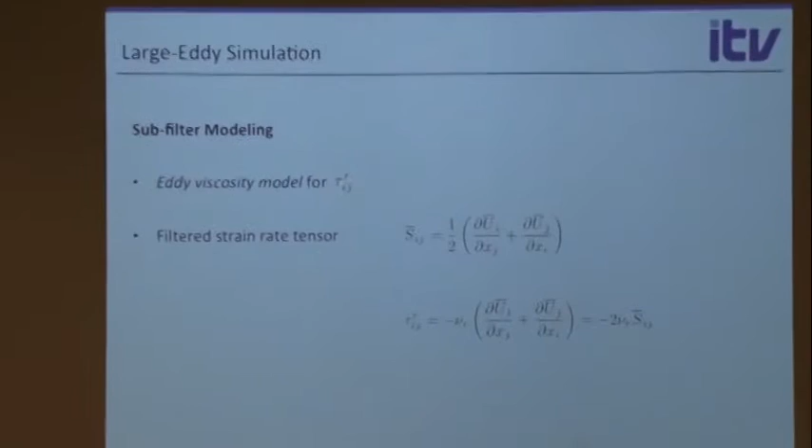So now I can think of a model for this. This is how it looks, and this ν_r here is much, much smaller than the eddy viscosity in the Reynolds averaged model, because it accounts for only a little part of the turbulence.

So what's interesting is earlier we had three different models. There's the Prandtl mixing length model, the simplest of all models, then the K equation model, the K epsilon model, and other models of that sort. Now, what should we do here? We said it's a similar modeling problem.

What people use here is the so-called Smagorinsky model. Turns out that is the same as the Prandtl mixing length model, so that's the simplest of all models—just given a different name, and it sounds fancy.

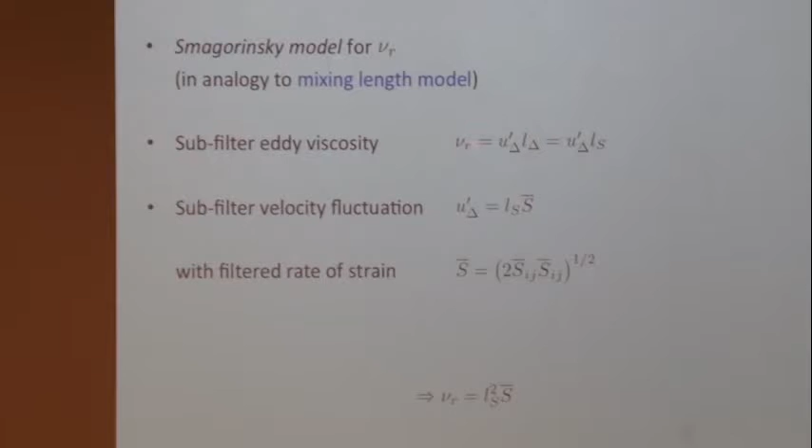So now, there's a reason why you would do that. What was the problem with the mixing length model is that you, as a user, have to prescribe the length scale of the turbulence.

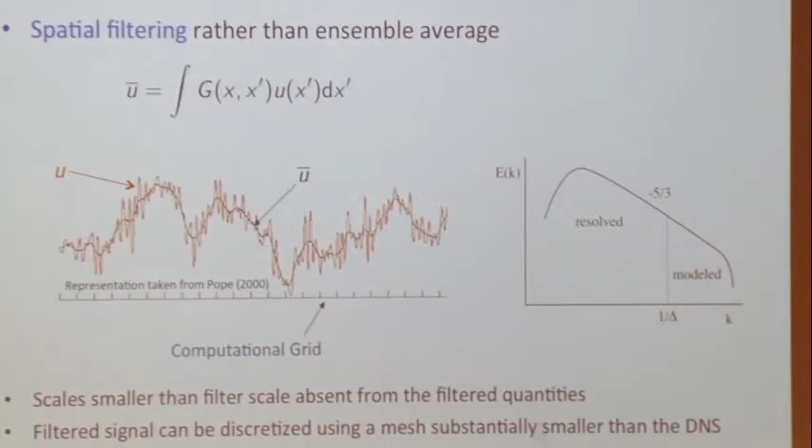But here, because the filter has a length scale delta, that is prescribed anyway, and with delta I filter all this out, we know what the relevant length scale is for the subfilter contribution to the turbulence, because it's exactly the filter size.

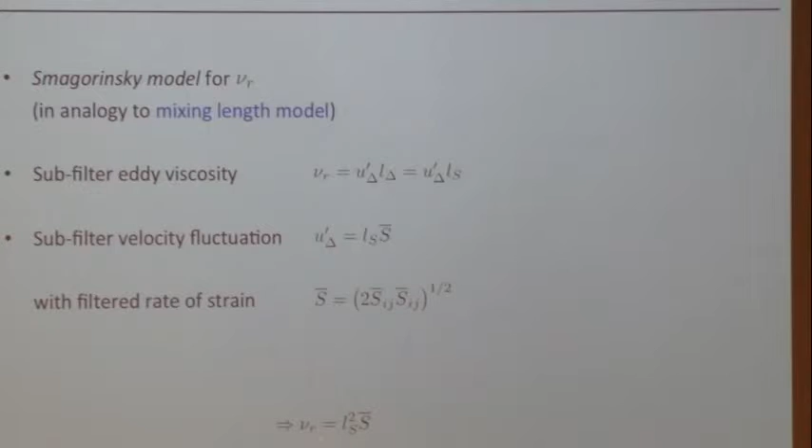So because we know what the length scale is, we can use the mixing length model: it's given as U prime times L, where L is the filter size, and U prime we take from the rate of strain. This here is the Smagorinsky length scale—just a constant times the filter width, the filter applied to filter the velocity field.

Okay, so that gives me nu_r. Was there a question? Yes—how do you select the filter size?

That's a very good question, because it is interesting that this model leaves that open to you. The LES leaves it open to the user to select the filter size, and I can tell you, typically it's selected incorrectly. What we typically do is implicit filtering in LES: implicit filtering means I take the computational mesh as the filter size, or I take the filter size as my computational mesh size.

That means your computational mesh changes in certain ways, but when you put together your computational mesh, you usually don't think about how to do this so that your filter size is also correct. Generally, you can say your filter size depends on your wallet—how much money you have in your pocket gives you the filter size.

If you have a lot of money, make the filter very small. You will get a very accurate solution—make it so small that you do DNS. The nice thing is, as you make the filter smaller and smaller, you resolve more and more, and you go towards DNS in a sense.